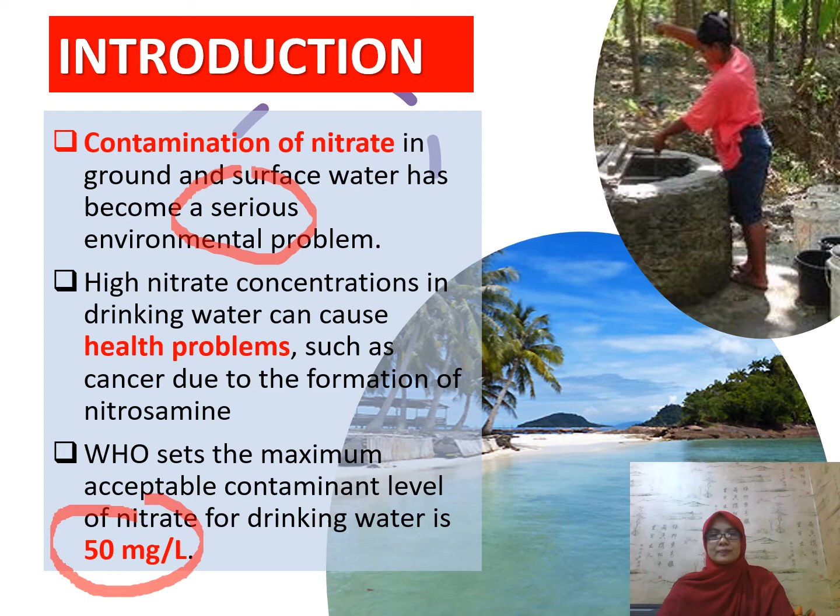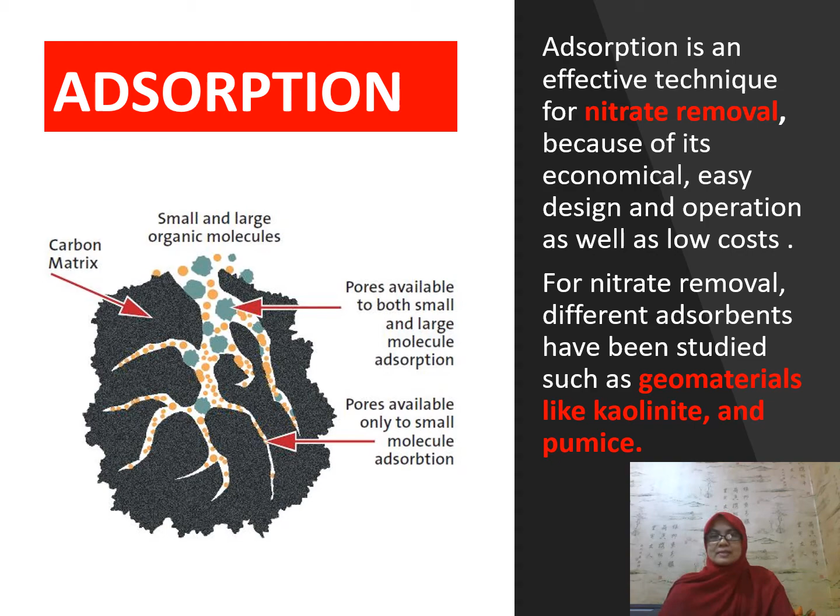To remove nitrate from water and wastewater, adsorption is an effective technique because of its economical, easy design and operation, as well as low cost. For nitrate removal, different adsorbents have been studied, such as geomaterials like kaolinite and pumice. However, some geomaterials have lower adsorption capacity. Therefore, various methods have been proposed to improve their adsorption capacity, like physical treatment by heating process and also chemical treatment using chemicals, including acids, bases, minerals, and oxidizing agents.

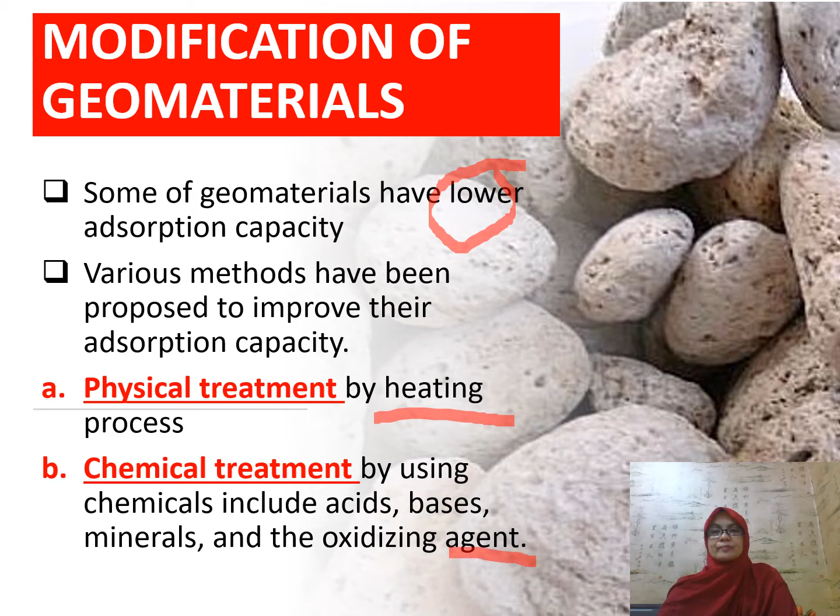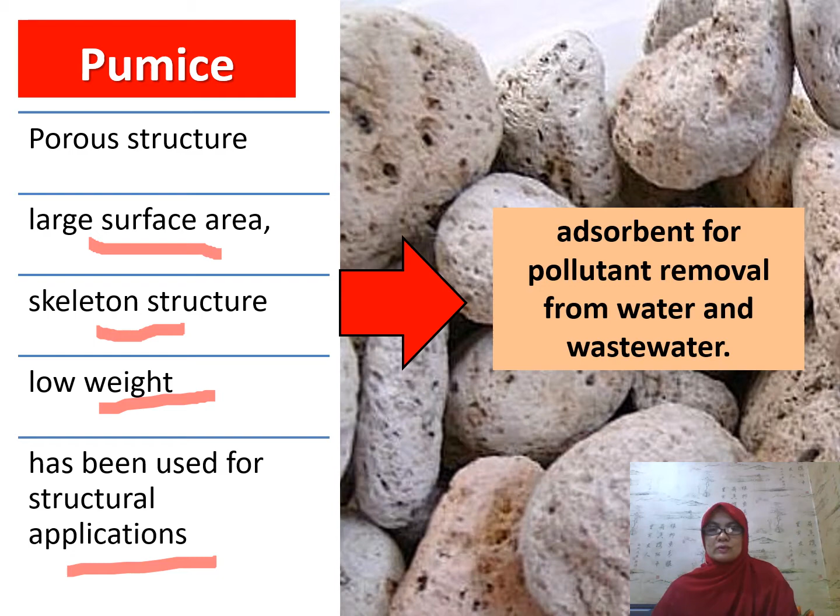So, let's talk about pumice. Pumice is a geomaterial that has a porous structure, large surface area, skeleton structure, low weight, and has usually been used for structural applications. But now, pumice can also be applied as an adsorbent for pollutant removal from water and wastewater. The objective of the present study is to evaluate the adsorption capacity of physically and chemically modified pumice on nitrate removal.

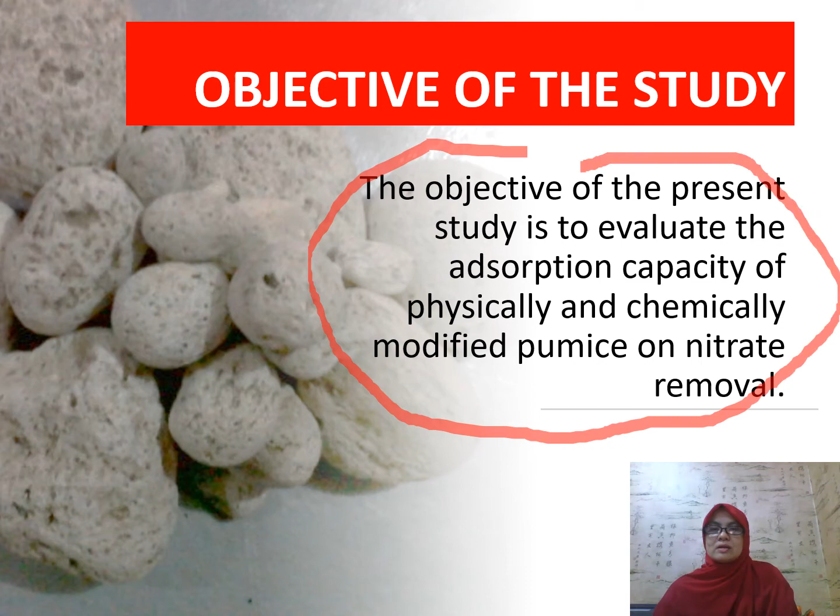Now I want to explain the material and method. The first one is the preparation of the adsorbent. Pumice stone was collected at the riverside of Sungai Pasak, West Sumatra, Indonesia, as a byproduct of sand mining in that area. Pumice was washed with distilled water several times and dried at room temperature, and then crushed and sieved in order to find the desired particle fraction.

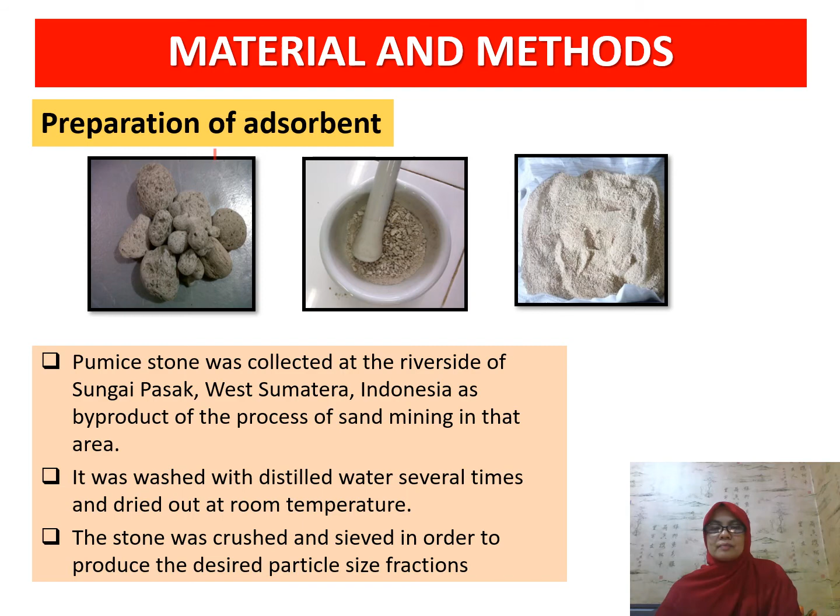And then we conducted the modification of pumice. For physical modification, pumice was heated at temperatures of 300, 450, and 600 degrees Celsius for 3 hours using this furnace. For chemical modification, pumice was soaked and stirred in 3 kinds of acid solution: hydrochloric acid, sulfuric acid, and nitric acid at a concentration of 1 molar for 4 hours, and then washed using distilled water and dried at 130 degrees Celsius for 3 hours.

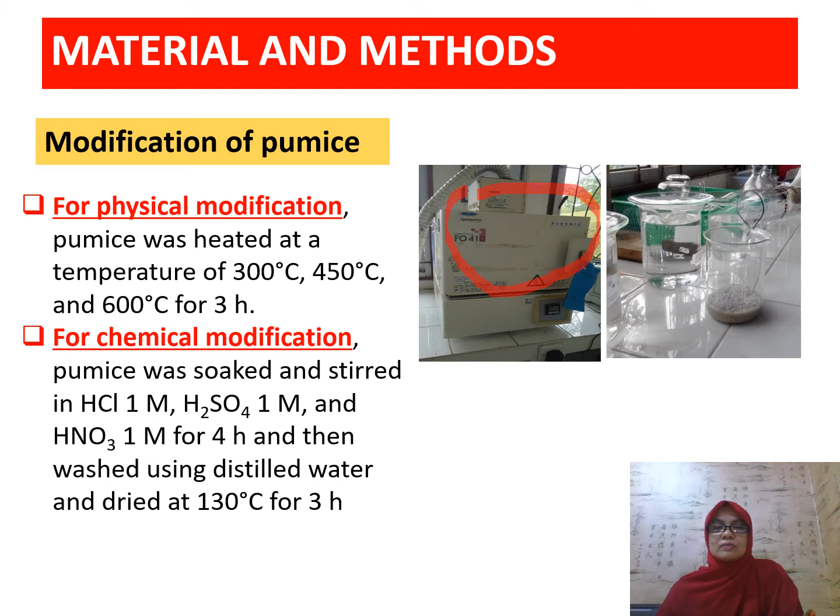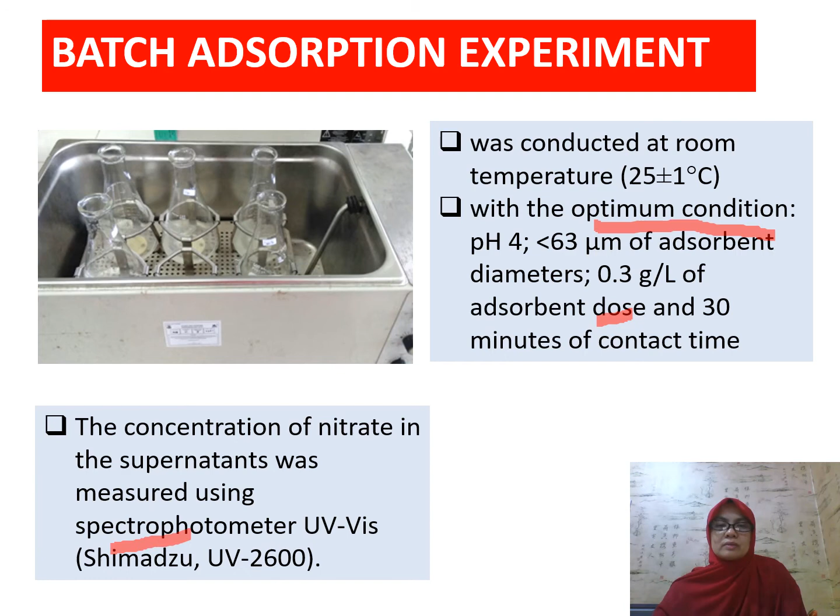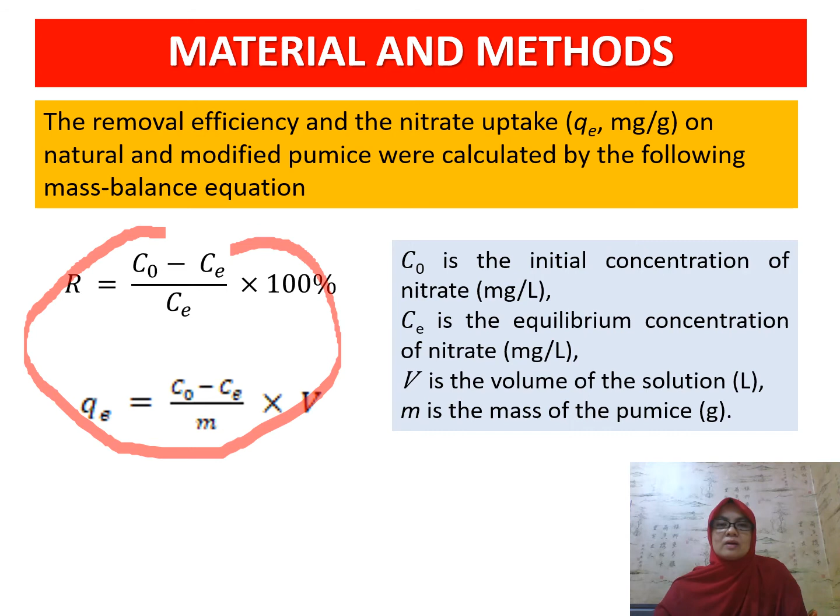After that, we conducted a batch adsorption experiment at room temperature with the optimum conditions: pH 4, less than 63 micrometers of adsorbent diameter, 0.3 gram per liter for adsorbent dose, and 30 minutes for contact time. The concentration of nitrate in the supernatant was measured using a UV-Vis spectrophotometer. This is the equation that we use to calculate the removal efficiency and the nitrate uptake on the natural and modified pumice.

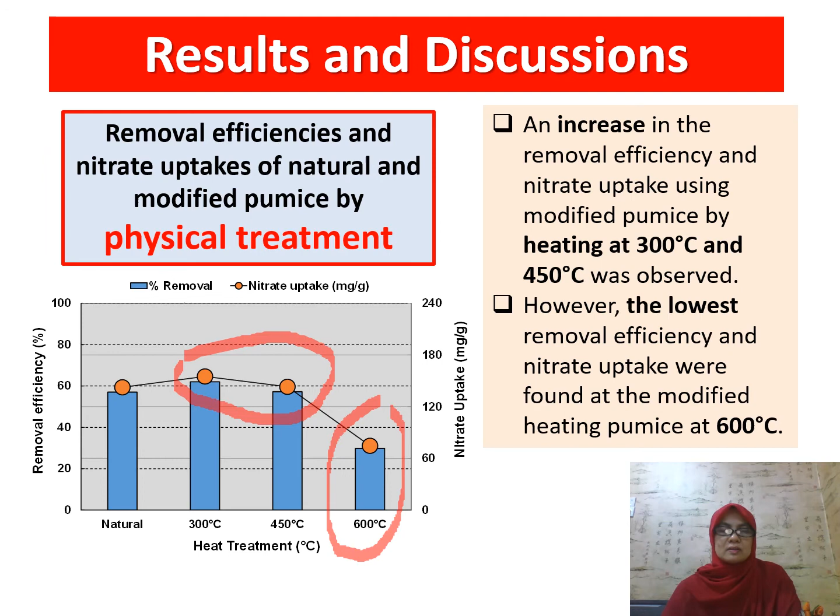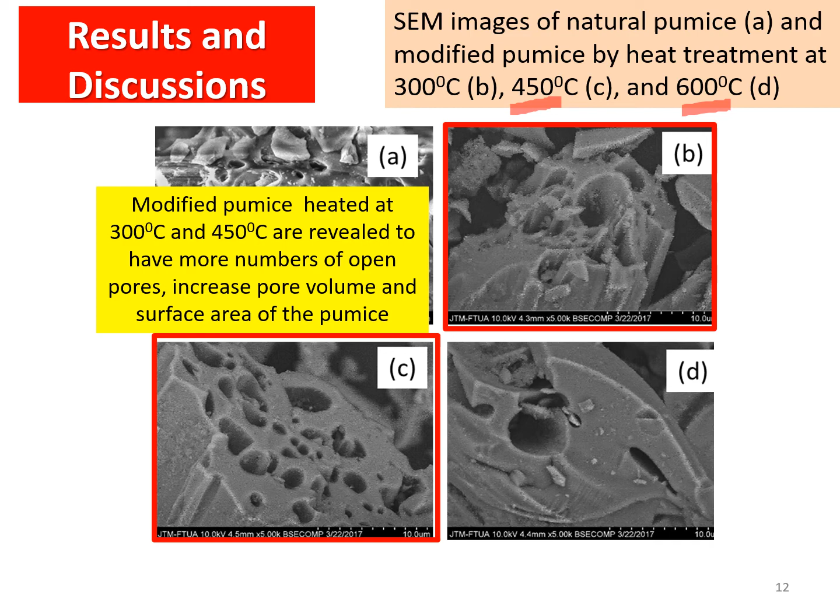These figures show the SEM images of natural pumice and pumice modified by heat treatment at 300, 450, and 600 degrees Celsius. The natural pumice has a relatively large number of pores, but the pores are covered by other compounds. Pumice heated at 300 and 450 degrees Celsius is revealed to have more open pores and increased pore volume and surface area. However, heating at 600 degrees Celsius seems to cause fewer pores due to damage in the structure of the adsorbent pores caused by overheating.

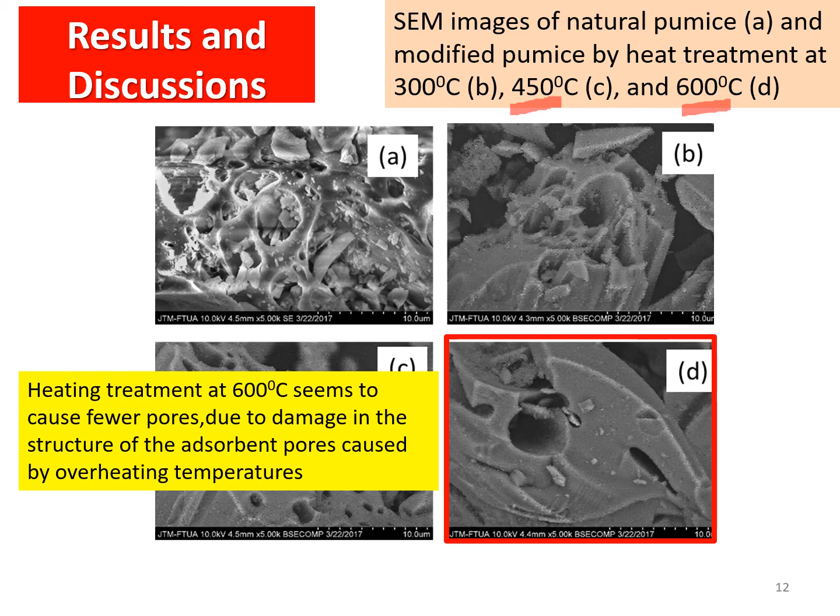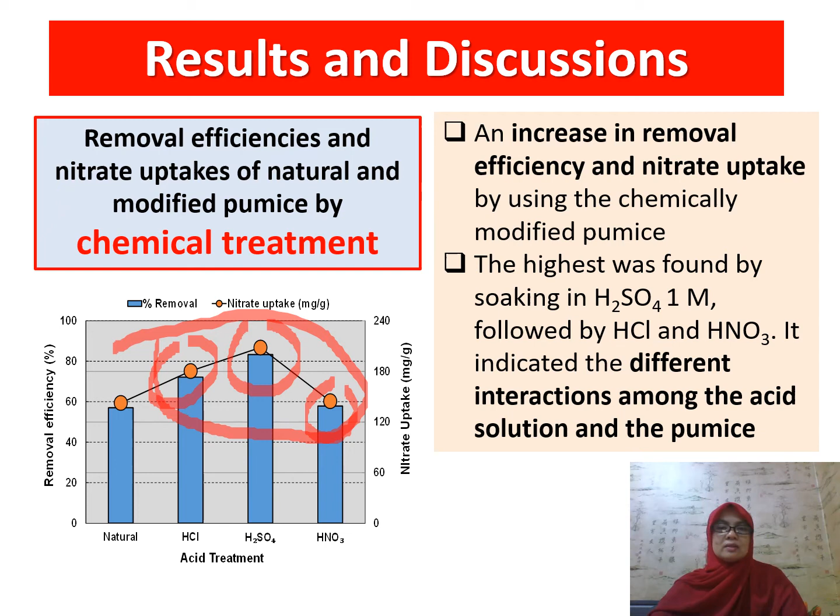This is the result of the chemical modification. These figures show an increase in removal efficiency and nitrate uptake using the chemically modified pumice. The highest was found by soaking in sulfuric acid, followed by hydrochloric acid and nitric acid. It indicated the different interactions between the acid solutions and the pumice.

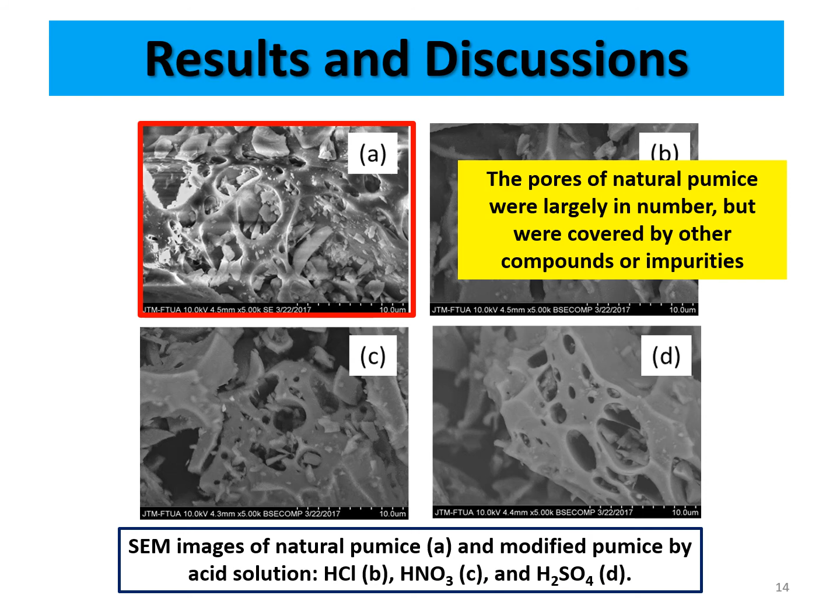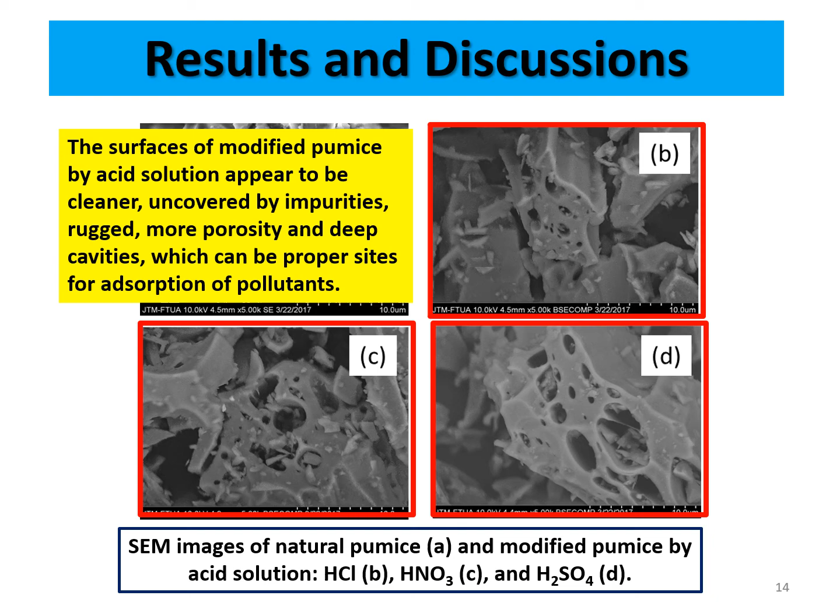These are SEM images of natural pumice and pumice modified by acid solution. The pores of natural pumice were large in number, but were covered by other compounds or impurities. But the surface of pumice modified by acid solution appears to be cleaner, uncovered by impurities, with more porosity and deep cavities, which can be proper sites for adsorption of pollutants. And pumice modified with sulfuric acid has more porosity and is more heterogeneous than the other samples.

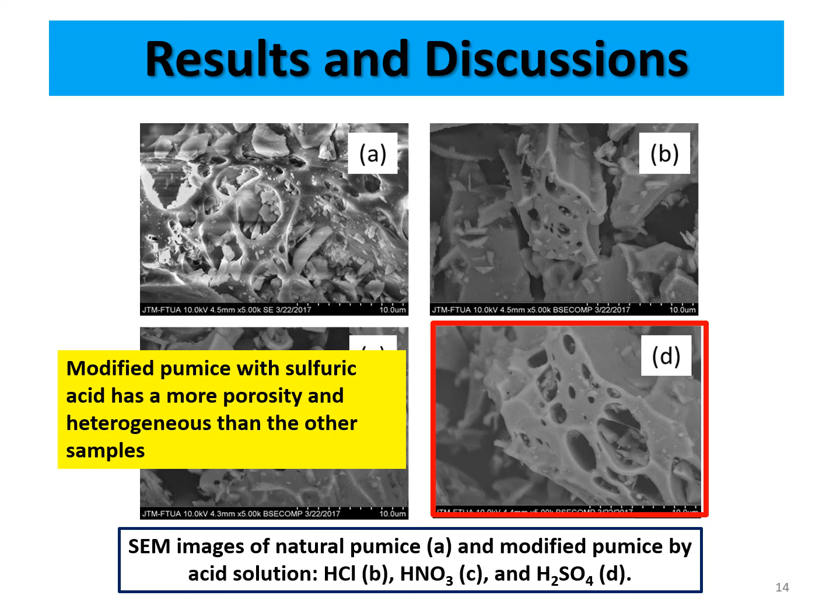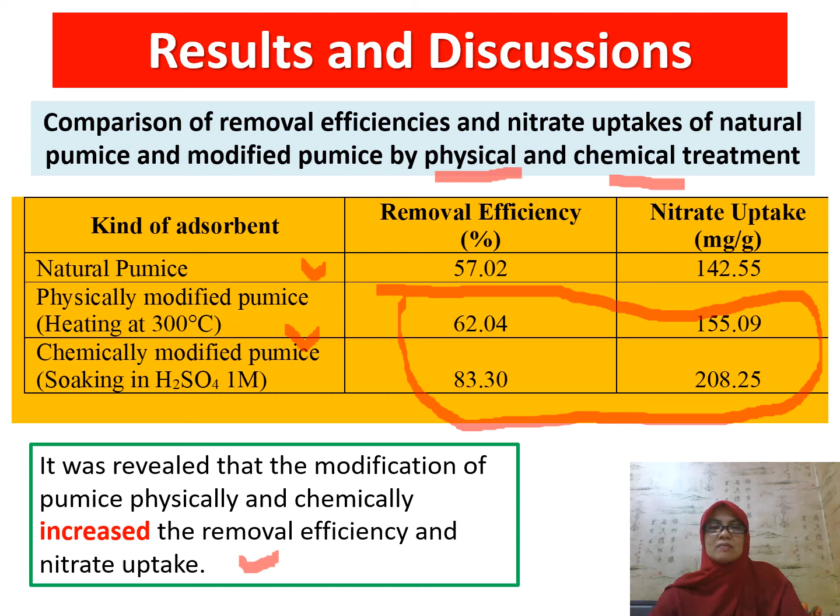Finally, I want to explain the conclusion. The results show that physical and chemical modification proved to increase the removal efficiency and nitrate uptake. For physical modification, heat treatment at 300 degrees Celsius was the best temperature for enhancing the removal efficiency and nitrate uptake. For chemical modification, the highest removal efficiency and nitrate uptake were achieved using pumice modified by soaking in sulfuric acid.

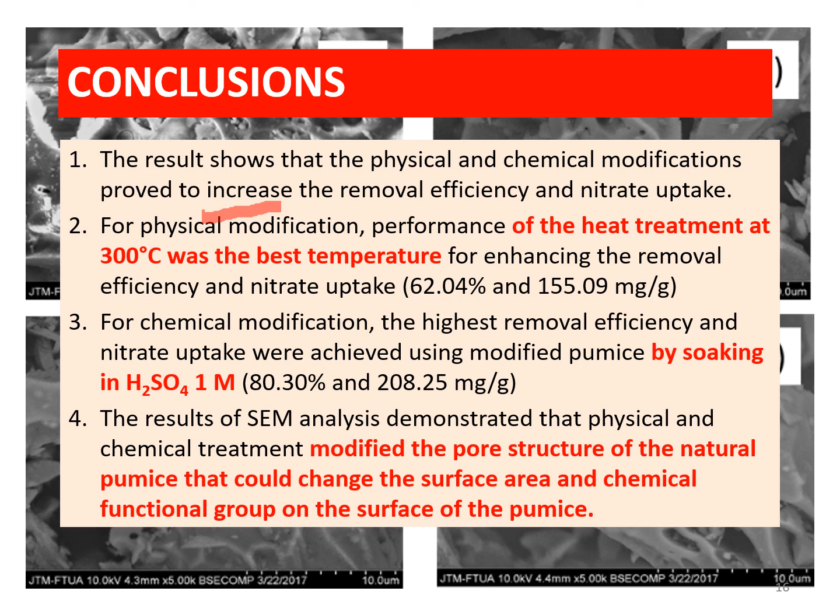The result of scanning electron microscopy analysis demonstrated that physical and chemical treatment modified the pore structure of the natural pumice, which could change the surface area and chemical functional groups on the surface of the pumice.